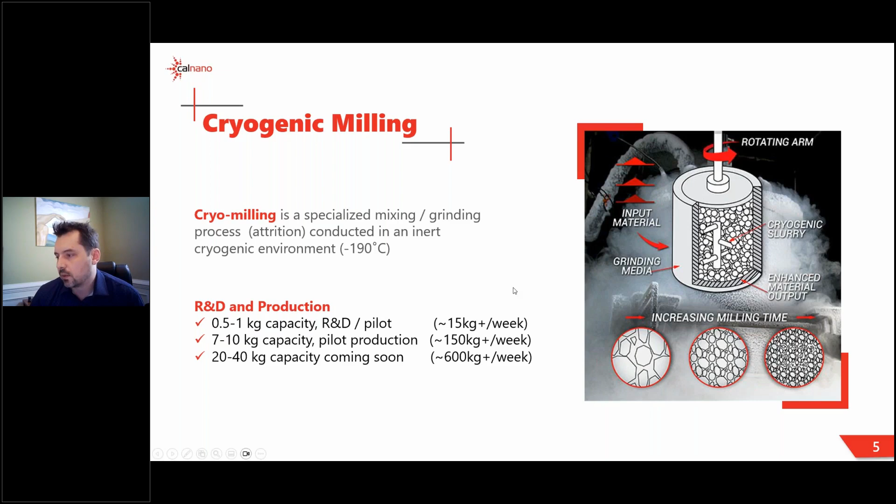So what benefit do you get and why would someone do this to a material? I'll start off with the most basic, which is standard particle size reduction. In many cases, materials come in a powdered form, but someone needs them in a finer powder, and that material doesn't want to break down or get ground very easily. Sometimes that's a function of the material's low melting point where it likes to re-agglomerate or melt into a bigger agglomerate. Sometimes it's just that the material is very tough, like rubbers and materials that have a high toughness that can rebound any cutting and grinding you might try to do to them. Those are usually the issues.

In that case, we are just embrittling the material with the cryogenics, and then the mechanism of the milling will break it down very quickly. So in some cases, it's that we can do it much faster. In some cases, it's that we can get to a finer particle than you could otherwise achieve.

The traditional application that we were actually founded on was really for the purpose of enhancing material strength. As one example, we took 6061 aluminum alloy, very common, and we were able to double its strength by just reducing the grain size. While we're cryogenically milling, the impact locations between those grinding media essentially act like a forging, where every little particle gets forged, reducing the grain size of the material.

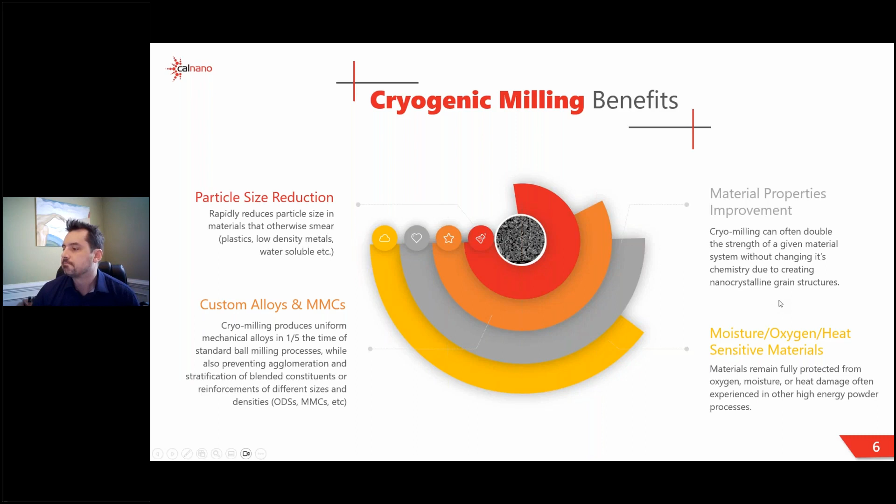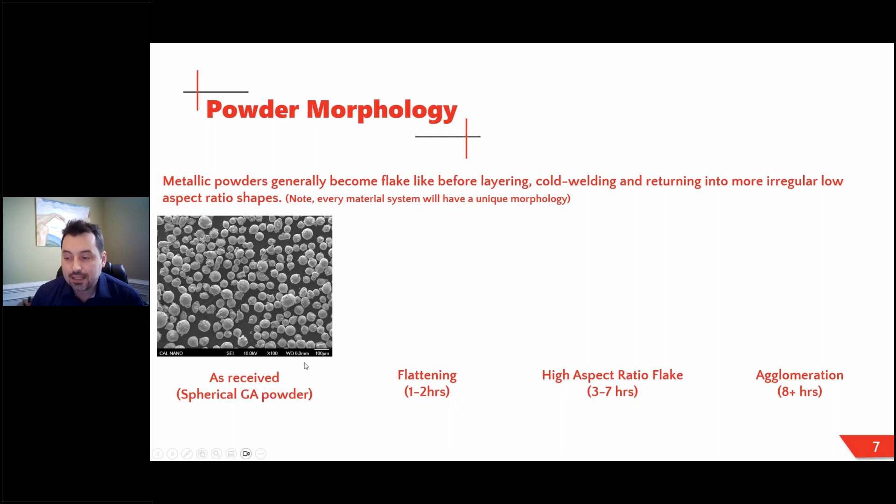So what does the material actually look like? There are many stories. This one will just cover an example of starting from a spherical powder. We don't have to start from spherical powders though. We typically start with materials in this process in conventional powder, thermal spray type grade powders from 20 to 30 microns up to the 200 micron range, similar to additive manufacturing starting materials. But sometimes we're running pure ceramics that are already crushed in an irregular shape.

This is just an example for a light material, aluminum in this case, that started off with spherical atomized powders. As we start to mill, those powders get compressed and smashed between the balls, and they pancake out as you'd expect. In the first half hour to hour, they start to look like kidney beans, and then they start to flatten out into flakes. As the milling continues, that flaking aspect ratio gets higher and higher, into thinner and thinner sheets.

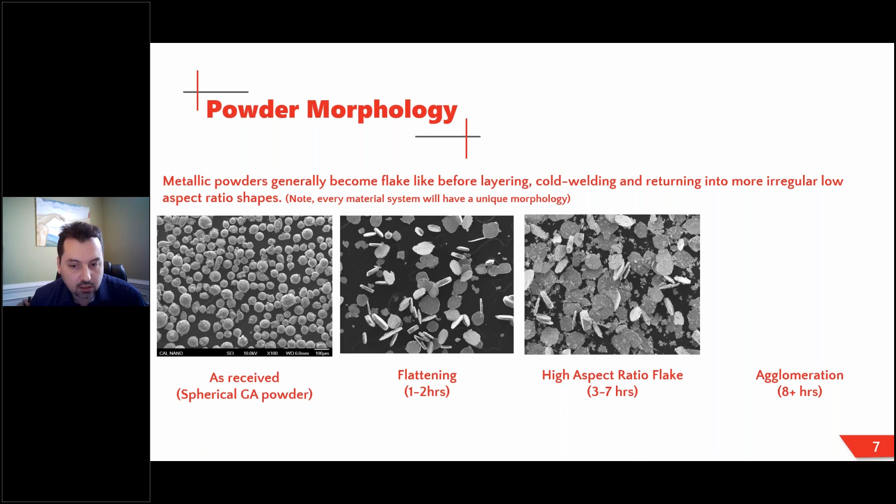Then as those sheets start to stack on top of each other, they get cold welded together. As the material gets stronger and is forged further, those structures get stronger, and therefore they actually start to agglomerate back into irregular shapes.

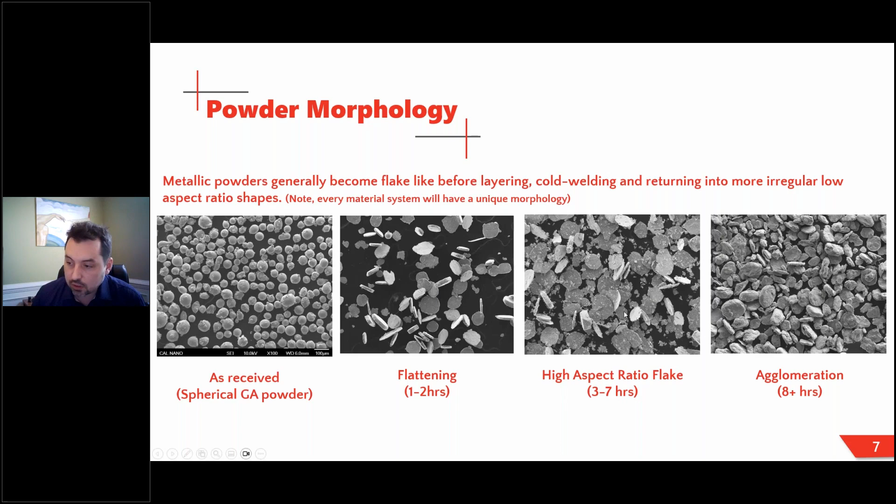This process is going to be unique to the material system. If you had a really hard or strong material like a super alloy, this result will happen faster given the stronger nature. The milling parameters, the speed at which we're milling, the type of milling, the media we're using all have an effect on this. But the main message here is that we are able to control the powder size. And in this case, we're actually keeping it a conventional size, which is an important point. So even though we're a nanotechnology company, we can control, when desired, the microstructure.

Here's a piece of one of these powders that's been cross-sectioned. We can see that we have a very refined grain structure into the nanoscale, as well as these hard phases that have been introduced, in this case aluminum oxide inside of an aluminum matrix. So we have a very uniform distribution of nano particulates, nano grains, but the particle sizes are conventional, in the several microns, 5 to 80 microns in this case.

We do that on purpose, because in the case of light alloys and most metallics, if you decrease the particle size and also don't have any oxide, that's a recipe for a very reactive material. In many cases it can become so reactive that it becomes pyrophoric, meaning it'll spontaneously combust as soon as it meets oxygen for the first time. So in our world, we prefer not to make nanoparticles, and in the case of reactive materials, we go through great lengths to make sure we don't. We get the properties of nano without having to deal with the dangers of nano.

And in this case, since we're dealing with just standard metals in powdered form, all of the standard powder processing secondary applications apply, and we've done work and or supply powders for all of these applications. Just a few that people would be most familiar with: hot isostatic pressing, which is great — we used to hip everything prior to getting into SPS, which I'll cover in a minute. Standard hot pressing is fine, it has its place, but it's essentially the rudimentary version of spark plasma sintering — just press and sinter. Cold isostatic pressing and then sintering, metal injection molding, various types of thermal sprays, cold spray. Sometimes these materials are just used as pigments or catalysts, sometimes for composite fuel materials, and of course additive manufacturing.

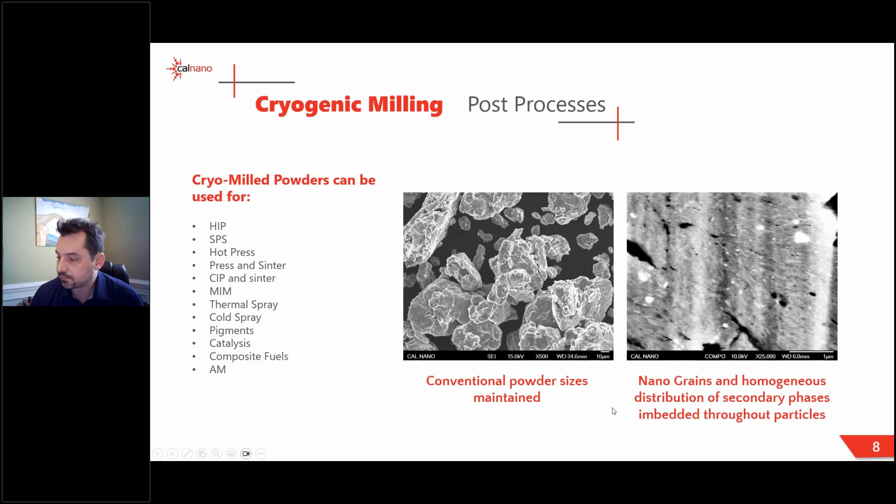So, cryogenic milling. As I mentioned before, when dealing with light materials and light alloys like aluminum, magnesium, and titanium, they tend to be reactive and very exciting when you're milling them. This motivated us, and we had a few small learning experiences in the early days.

That motivated us to develop systems to do this in a safer and more economical way. We actually have a patent on being able to produce materials with cryogenic milling in a safe manner. In some cases, the materials are usually in a liquid nitrogen slurry.

That's true, except in cases where the material likes nitrogen. Typically it's inert and doesn't react with too much, but some materials like nitrogen, and just from a material property perspective, we need to mill in liquid argon. Argon being substantially more rare and thus more expensive, that becomes cost prohibitive. We have a system that can mill in liquid argon at economics closer to that of liquid nitrogen, while also mitigating the dangers associated with producing fine grain, fine particle sizes of metals.

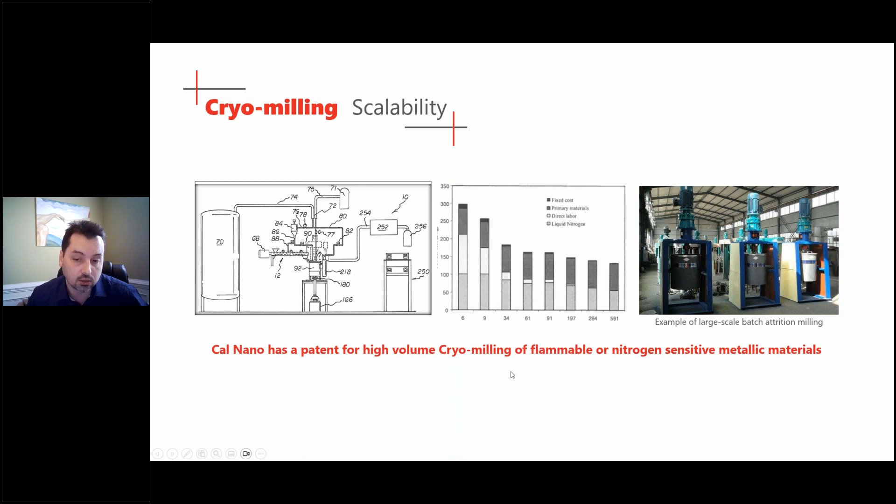This is an example of a large-scale attrition milling setup. This is the same scale of mills that we have. This isn't our facility, but it points out that just because the process is often done in a batch, there are many commodity-type products actually milled in this exact fashion, both cryo and non-cryo. This breaks down the economics a little bit, as you can see.

So, spark plasma sintering. Now that we have our enhanced powders—custom alloys, custom MMCs, oxide dispersion strengthened materials, or maybe high entropy alloys with very unique chemistries—at this stage, how do we consolidate those powders into a solid form without losing the properties we put into them, without melting them? Maybe the materials are just very hard to consolidate in general, like high temperature ceramics. That drove us to discover and implement spark plasma sintering.

So this is the basic layout. The most important thing to remember about spark plasma sintering is that there's no sparking and there's no plasma. Early on, the process is done in a vacuum, and many of the original originators of the technology assumed that since we're putting a voltage potential difference across the material under vacuum, that's typically a recipe for plasma. However, the voltages are very low, and more studies conducted in recent years have made it pretty unanimous that there is no sparking or plasma.

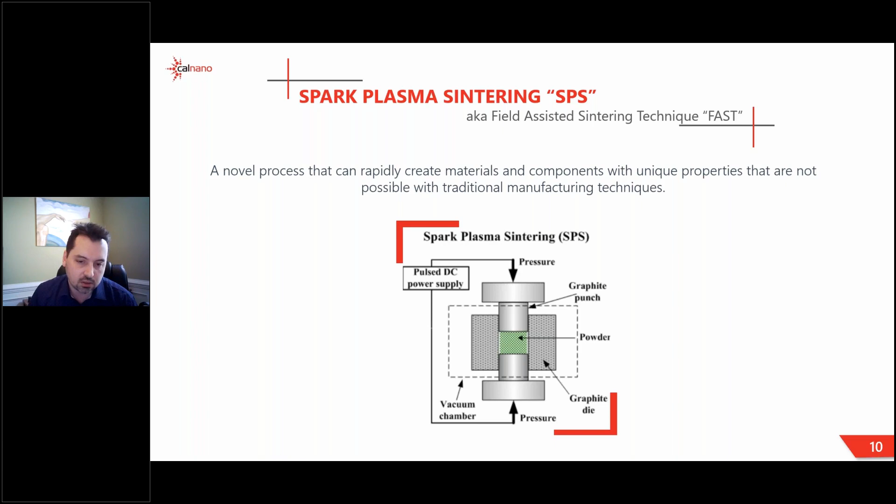So a more popular and maybe more accurate name is field-assisted sintering technique. There are probably three or four other names that different labs and universities have coined for the same exact technology, which is fine for novel paper writing, but is a bit of an extra challenge for us on the commercial side, as it scatters much of the positive results that have occurred over the last decades.

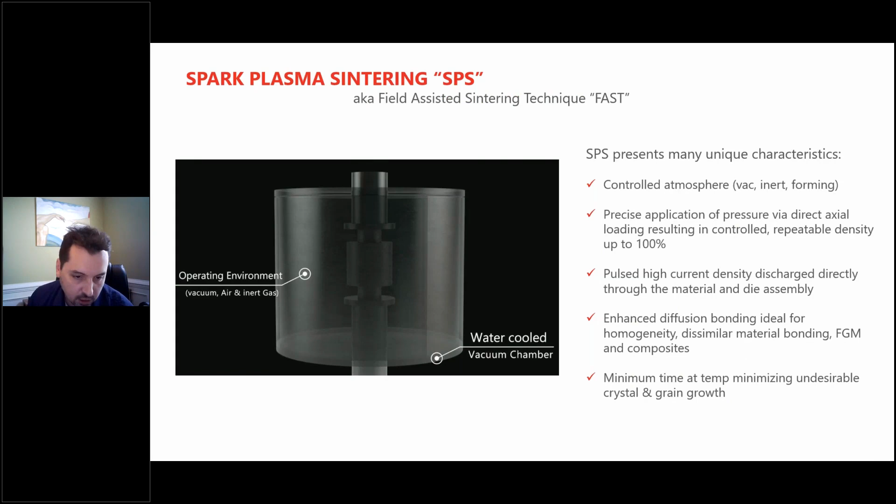So, as I mentioned, here's the basic setup. Typically we're sintering in a vacuum atmosphere, but usually after an inert gas flush of nitrogen or argon. You'll see here we have our powdered material, in this case in a cylindrical die. We apply uniaxial force, then pulse the current. Those sparks you see don't actually exist in real life, but they help visualize the localized temperature increases at the particle boundaries.

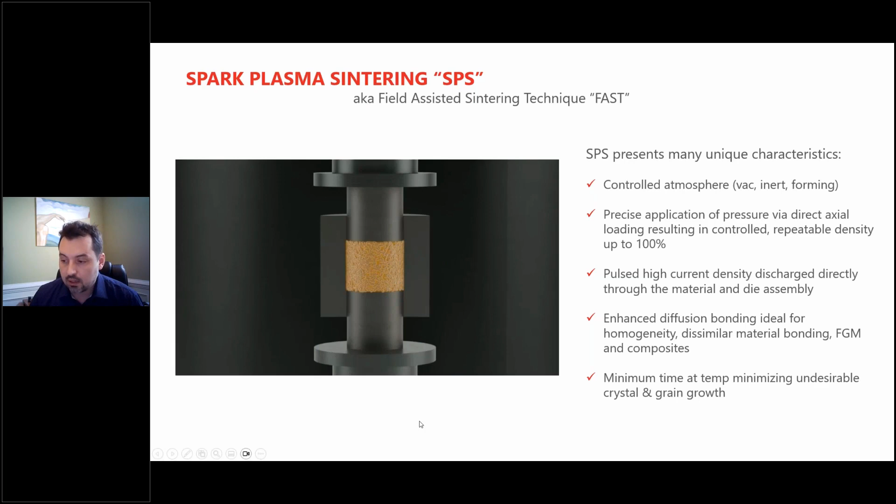This is a very important differentiator compared to other sintering technologies. We are actually using the material itself, or the tooling in the case of a non-conductive powder, as the heating element. Since there's no heating element in the furnace, that gives us extreme versatility, and allows us to have no theoretical maximum temperature—the highest temperature is really just limited by the graphite itself or the material. We often run north of 2000 degrees Celsius; there just aren't too many applications needing higher than that. But we also don't have a minimum.

So in this case, we can actually apply very low pressure and temperatures, and we've done lots of work on things as low temperature as polymers and reinforced polymers. Since we're adding pressure and temperature via the electrical current discharges independently, we can also produce not only very high density materials, but very low density if we want to. And that's actually a growing need for things like heat pipes, heat sinks, catalysts and filters, where we can get very strong interparticle bonding without collapsing the pores inside by having a very low or minimum pressure.

And we can get a very strong mechanical bond between those particles, allowing the final product to be an engineering material without having those porosities, keeping a very high surface area and tortuous gas paths through the material. So one of the benefits of SPS beyond that is because we are heating the material directly and not just heating up a giant box and waiting for that heat to soak in, we also get much faster cycle times.

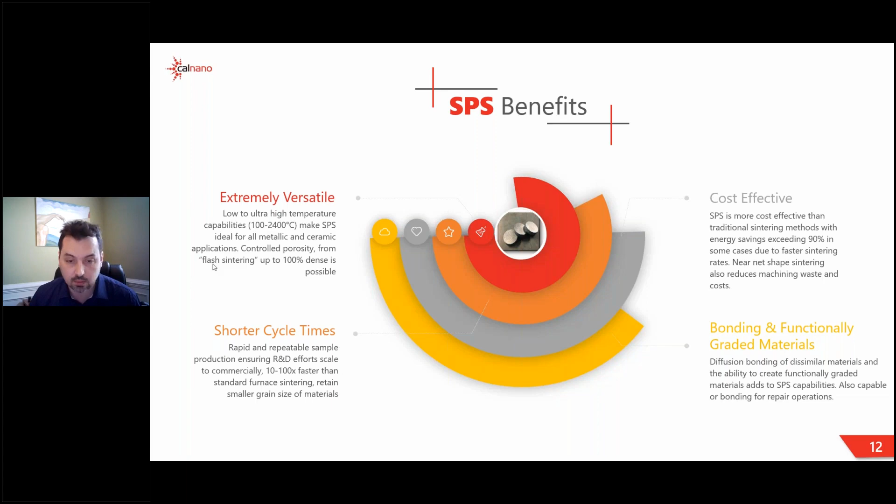So what kind of applications and who does this for what? Well, some of the more basic ones are just doing basic wafers for things like PVD coatings, physical and chemical vapor deposition targets, cathodic arc deposition targets, where you just need a pure material, maybe hard to sinter, maybe not, in a very pure form that's sintered for coating applications.

Another area that we see a lot of gains that are unique to SPS is in the world of thermoelectrics. Not quite 100% sure on all the fundamental mechanisms there, but essentially there's a little bit of a secret sauce when it comes to thermoelectric materials and their ZT properties when consolidated with SPS. I presume it's something to do with the electrical current going through.

And for those who aren't familiar, thermoelectrics are a wonderful phenomena based on the Peltier effect, where essentially if you add electricity to one of these cells, one side will get hot and the other side will get cold. If you put a heat sink on the hot side, then that's a system that can be used for small scale refrigeration. And in reverse, if you add heat and allow the other side to be passively cooled, it'll generate electricity. So these are finding homes in everything from remote location power generation to energy harvesting from other industrial processes.

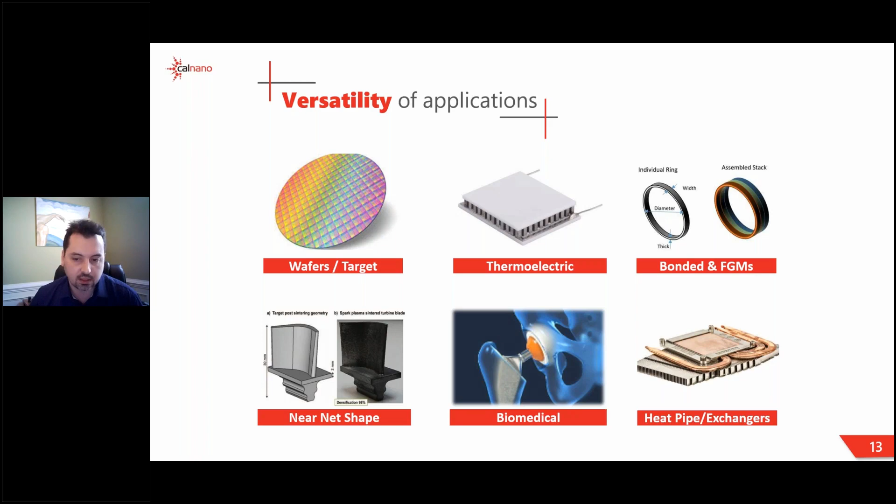Several years ago, when I was first pitching SPS technology at conferences, I would always get the same answer back: 'SPS sounds nice, I've read a paper, but I want something larger than a 1-inch button, so maybe SPS isn't for me.' Nothing could be further from the truth.

I've had the pleasure of seeing several full-scale production facilities utilizing SPS as their sintering and forming technology. There are several ways you can actually scale up depending on material properties, part shape, and your exact requirements. One way is just scale - you go larger.

We operate several SPS units at our facility, the smallest of which runs tooling about the size of the one on the die there - that's R&D size tooling. This is the die, and it can go up to 2 feet in diameter. That's the die at our friends at Idaho National Laboratory, where we do collaborative work with them on a regular basis. We actually have a unit a little smaller than this coming to our facilities as well.

Another way to make many parts is to fit multiple parts inside one die. Inside a unit this large, you can fit multiple holes inside a multi-cavity die, and each cavity can also have several parts stacked on top of each other. So in this case, every sintering run, if you had 12 cavities and each had 12 parts stacked, you could be making 144 parts per run.

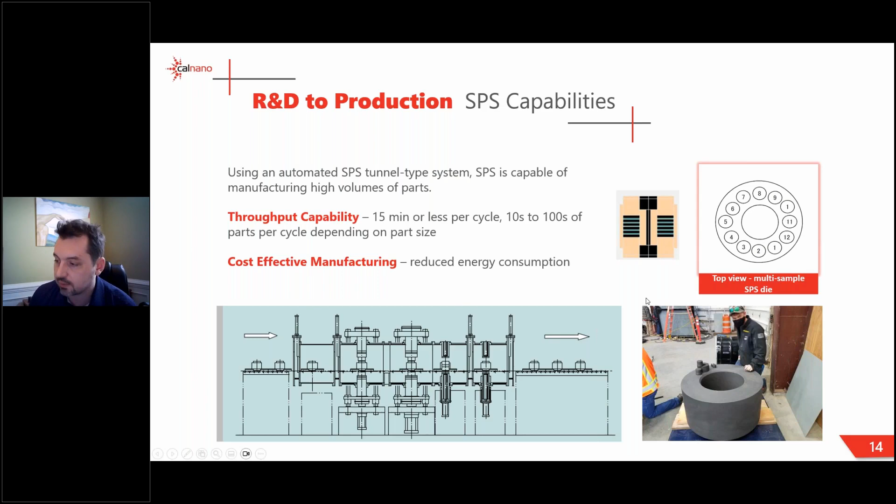Another way of dealing with higher volume demands is a tunnel type system. The process starts with the material and die being evacuated under vacuum. It then gets preheated to a degree before the plastic range, then it does the sintering, then there's a cool down under vacuum so the graphite doesn't degrade or oxidize, and then it gets purged back to atmosphere. In a tunnel type system, all of those things happen simultaneously, so the production rate is tied to whichever single part of the process is longest, not the sum total of all those stages added together as in a single stage system.

There are several of these tunnel systems in Japan running for different types of components, and that's another thing that usually isn't known to most people in the industry.

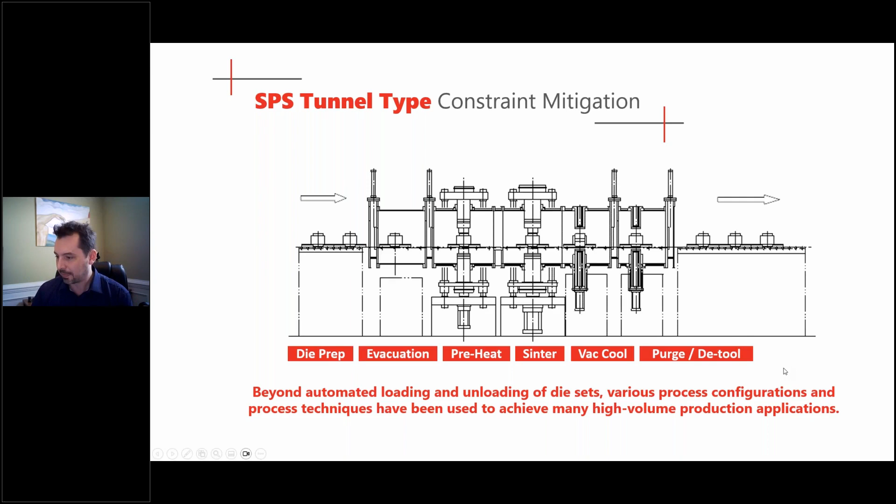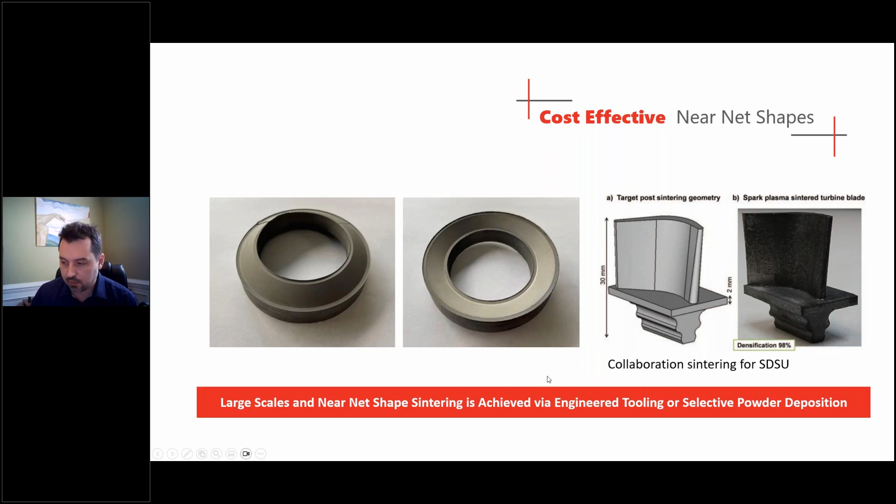So near net shaping is one of the additional benefits. I touched on the binder jet and a little bit of the tooling for net shaping, but just to recap, we can actually do quite a bit. This is a part straight out of the SPS - you can see a little bit of flashing here, and a little bit of parting material from the separation foils we need to use. But other than that, you'll see the very fine surface finish and very high tolerance - your surface finish matches your tooling. In this case, if this part is made out of a more expensive material, there will be significant savings in lost material and reduced secondary machining. So a lot of work is going on in net shape or near net shape manufacturing, and that's one of the main advantages to SPS as well.

This is a bit of a paradigm shift for us. This is hot off the press. We recently partnered with a company called Aerosint out of Belgium, and we purchased one of their selective powder deposition units. So here's another way to integrate additive manufacturing, combining it with spark plasma sintering.

With a pixel size of about 200 microns by 80 microns, we can deposit very specifically powder A, powder B, and powder C. In some cases, all those powders might be sintering together to make a composite component, which might have built-in heat sinks, built-in channels, and different materials bonded to each other.

In some cases, one of those materials might be a support material that does not sinter to the main material, but is removed later, leaving you with a 3D shape.

And in some cases, you get a bit of both, where we can do different materials on top of each other bonded, also in a 3D shape.

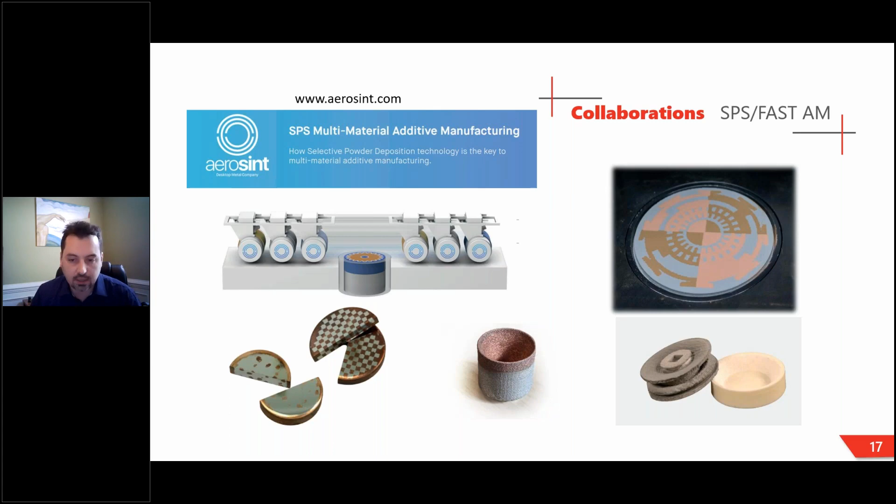So for us, this is a bit of a paradigm shift. It's a great way of being able to lay down very uniform, controlled thin layers, as well as making intrinsically built cooling channels, heating channels, and internal geometries that you couldn't make any other way, while also getting the benefits of SPS for the consolidation.

Another one of our collaborators is a company called Norimat, and here's another example of that—a binder jet turbine blade. They also did this.

The other one we did in collaboration with our friends at San Diego State University. This is a comparable version, and here they did some micro analysis to show the densities throughout the part.

The bigger aspect we work with them on is the modeling side. As you scale up, here's an example, some screenshots of the heating profile of a very small die. In this case, there's not really much to look at—the heating happens very uniformly, and there's not much to worry about.

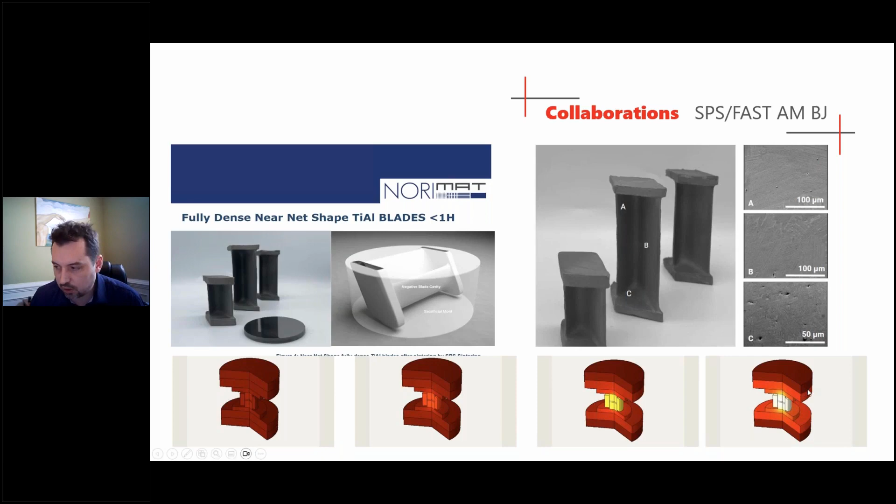As the parts get larger, as the tooling gets larger, and as the geometries become more complex, this uniformity ceases to exist, and you need to plan for that. If you have very asymmetrical tooling, you can end up with hot spots or cold spots, leading to non-uniform consolidation. This modeling software allows us to predict that before investing in large, expensive tooling, enabling us to mitigate those issues and ensure proper densification.

So as a recap, what do we do in the world of SPS and FAST? Well, we offer toll services. Often we have customers coming to us saying, hey, we already have an SPS, but we can't make a part big enough—can you help us make a bigger part? Yes, we can do that.

Or, hey, we have an SPS, but it's too big and we don't want to waste that much material making a bunch of samples—can you make a bunch of smaller R&D samples for us? Yes, we can do that. We are interested in evaluating SPS to replace our current technology, but before we invest in the equipment, we'd just like to run some proof of concepts and do some testing. Yes, we can do that.

Once you are ready and decide you want some equipment of your own, we offer equipment sales. We are the official exclusive representative in North America for Suga, the Japanese equipment manufacturer. We also work with several other manufacturers in and around SPS for larger equipment and support equipment, and we will coordinate to get you the equipment you need, all the way from lab scale up to full production.

Once you have equipment of your own, we offer consumables. We make all of our own graphite tooling in-house up to a certain size, and we supply it for an array of users, from national labs to universities.

And once you're operating, we will offer technical support, including training of your staff, as well as retraining and/or equipment maintenance as needed.

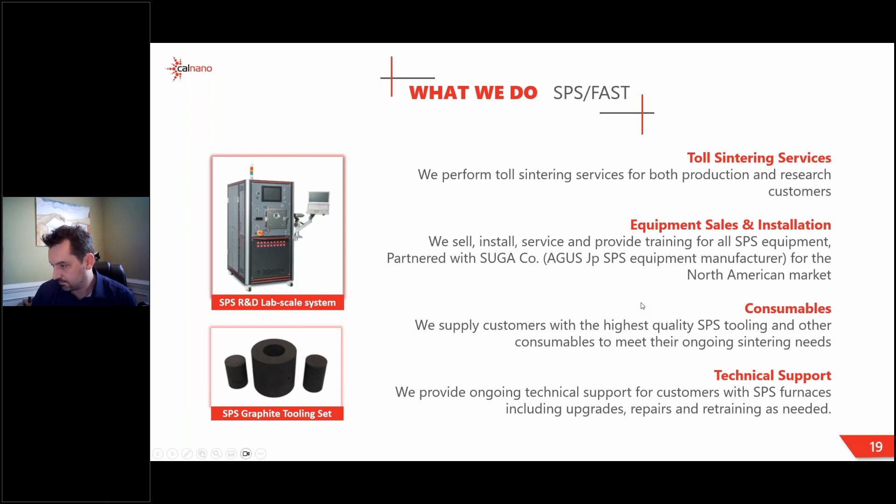They're probably about double this now, but currently we have a unit we call the ±1 inch. The temperature and pressure you want to go to will dictate the maximum size, so that's why it's approximations in both cases. We have about a 1-inch machine and about a 7-inch machine. Both will go to essentially that same max temperature, given there is no real max temperature.

We call this one more of the semi-pilot production machine and this one more of the R&D machine, but sometimes production means small parts as well.

We do have the ability, and as a standard we handle and load all of our tooling in inert atmosphere glove boxes. For some commercial products, we won't by design. If the commercial product will not be doing that, then we will do our developments according to the production plan.

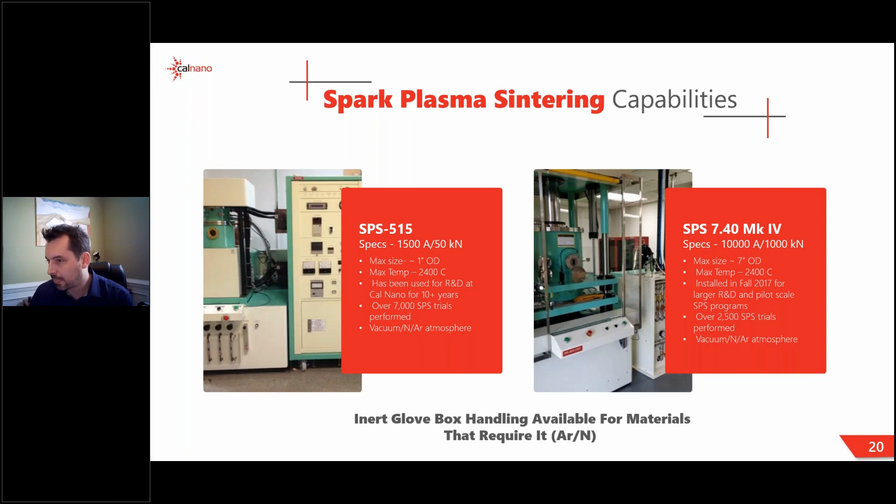As I mentioned earlier, we also have a nice ability to make a one-stop shop for prototyping. We have a nice setup with some wire EDMs, sinker EDMs, mills, and lathes, as well as a nice little testing facility, which I'll talk about.

This is really nice for some of our less established customers who might not have a lot of capabilities. And even those who do, sometimes it's just nice to have everything come from one shop. Often we're just producing test coupons or test samples, but often we're actually making prototype components that'll go straight into testing for the final applications.

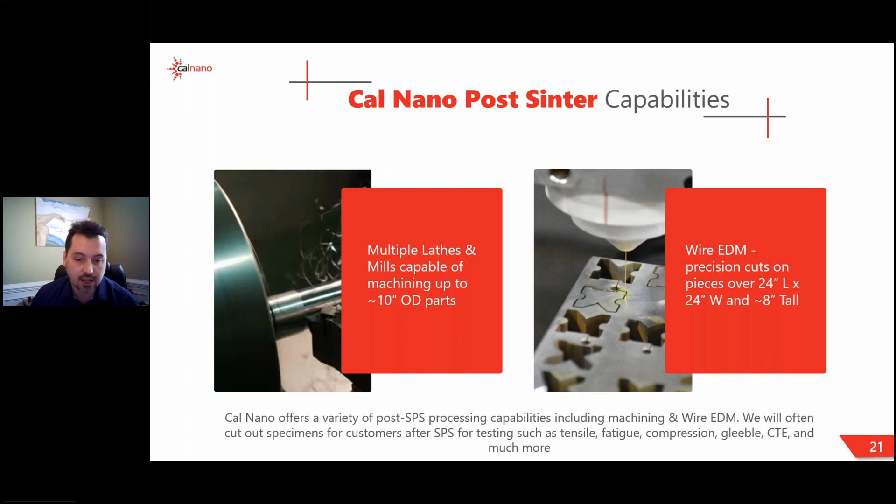As I mentioned earlier, we have a nice little testing lab. Nothing compared to our friends over at, say, Lift, but it's nice enough to get us by. We do offer laser particle size analysis, which is very critical in all of our milling efforts. Whenever we do milling trials and R&D runs, we always offer a comprehensive report with before and after particle size analysis.

We have the ability to do some smaller scale planetary ball milling for very small samples, if you want to do mass spec on things like that. And of course all the standard mechanical testing - tensile, compression, transverse rupture strength, hardness, micro hardness, surface roughness, and all that. It's nice for those who don't have these things that we can provide that as well.

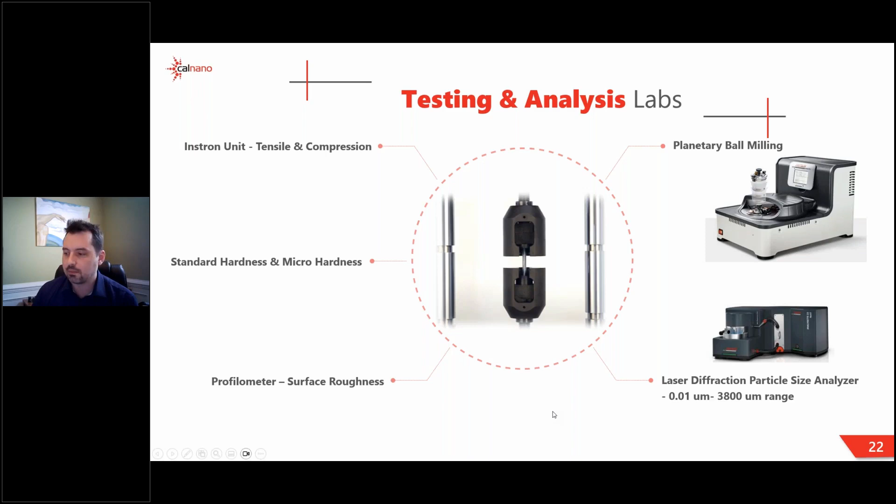So, applications. As I hinted at earlier, we work in fundamental material science, and we literally have customers and applications that span every industry imaginable. Most materials, I think, are always the constraint in human development, to the point where we define the ages of man based on the materials we have - from the Stone Age to the Copper Age, the Bronze Age, and the Iron Age. Nothing really changes.

Our ideas are limited only by our materials in all of these sectors, and we have active work in all of these areas. It's never a dull day in our offices and labs because there's always something new and interesting coming up. That's essentially what we do.

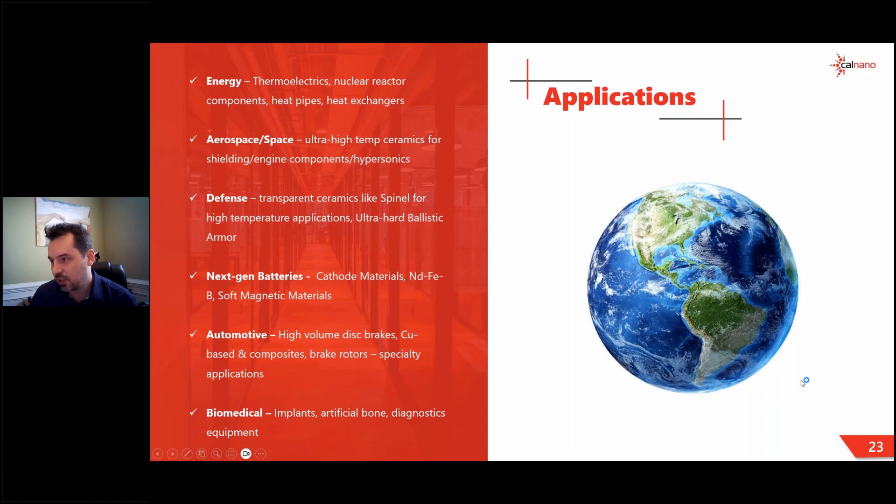So if there's any questions on any of these technologies, I'd be happy to answer some of those questions.